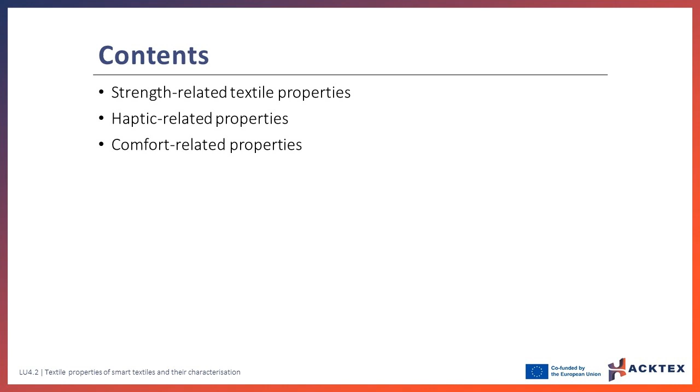In this lesson, you will learn about the most common tests used to determine the textile properties of smart textiles. The strength-related properties, which measure the behavior of the material under tensile, tearing, and friction forces, determined with tensile, tearing, abrasion, and pilling tests, will be described. The haptic properties, related to the tailorability of the material as well as its wearing durability, will be described next. Finally, the most common tests used to determine comfort-related properties, such as flexibility and wrinkle resistance, air and water permeability, and the capacity of textiles to absorb water, are described.

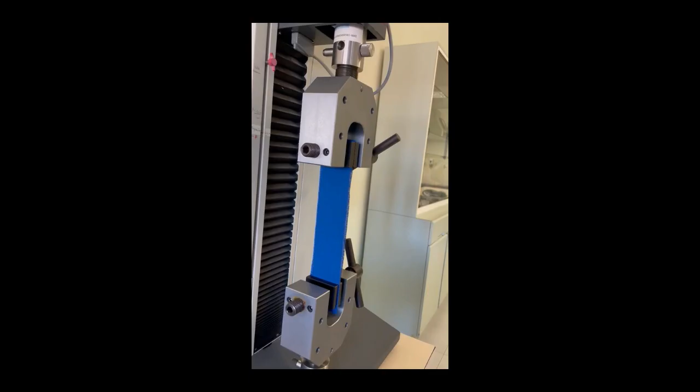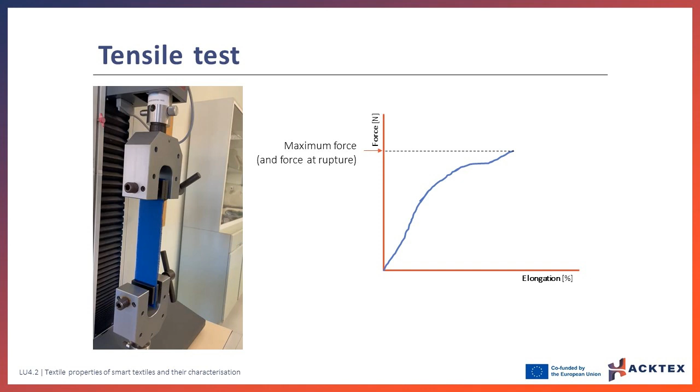The mechanical behavior of textiles when subjected to axial tensile forces is measured through tensile tests. In the tensile test, a specimen with specific dimensions is stretched at constant speed until breaking. The necessary force to perform the stretching, and the elongation of the material, are registered. The maximum force, given in newtons, and maximum elongation, in percentage, are determined.

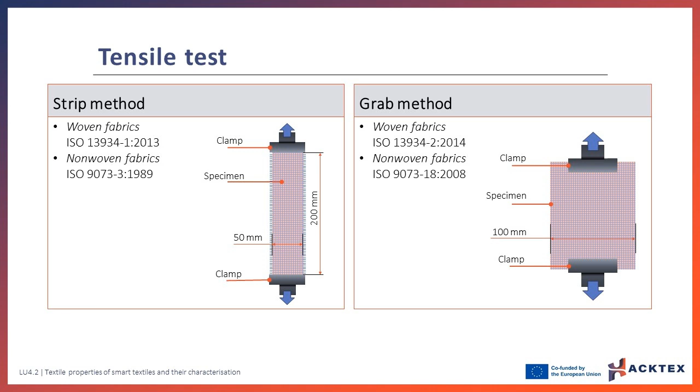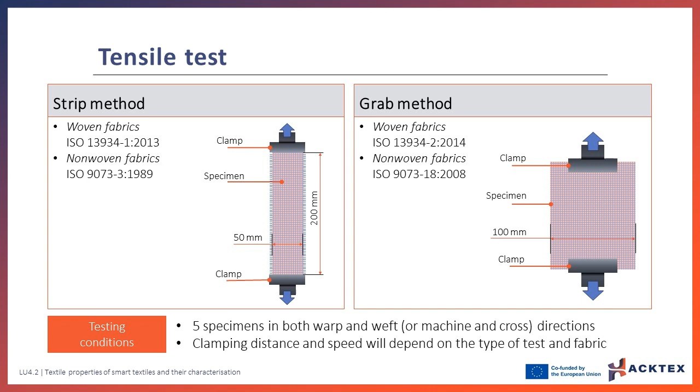There are two possible configurations for a tensile test: the strip method and the grab method. In the strip test method, the width of the specimen fits with the clamp's width. Typically a specimen of 5 by 30 cm is used with a distance between clamps of 20 cm. In the grab test, a wide specimen is mounted centrally in the clamps, with dimensions of 10 by 15 cm, and the distance between clamps depends on the fabric type. In both cases, 5 specimens per direction must be tested, whereas the clamping distance and speed will depend on the type of test and fabric.

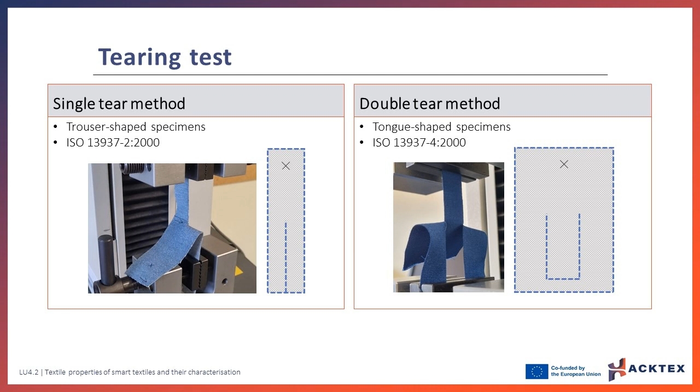The tearing test determines the resistance that a fabric offers to continue tearing at a constant speed, once started. They are performed in the same dynamometer used for tensile tests. The average force for tearing is determined from the curves. There are two possible configurations for a tearing test: the single tear method, using a trouser-shaped specimen, and the double tear method, using a tongue-shaped test specimen. In both methods, 5 specimens have to be tested at a constant rate of 100 mm per minute.

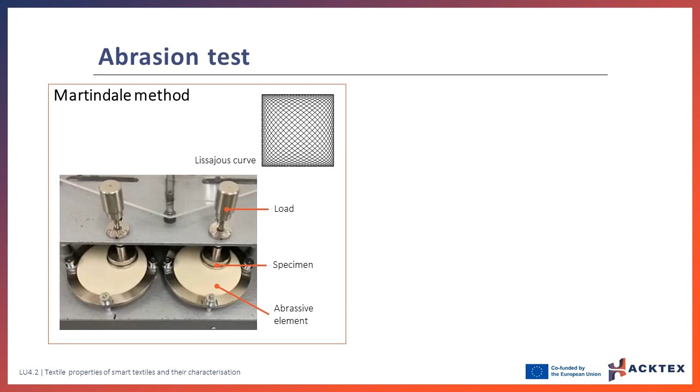The most common method to determine the resistance to abrasion of textiles is the Martindale test. In this method, two circular surfaces are in contact. The upper surface is covered with the fabric to be tested, while the bottom one can be covered with the same fabric or with an abrasive surface, such as a standard fabric. The specimen is subjected, under a specific load, to the scrubbing action with the abrasive element, following a translational movement that forms a Lissajous curve. At the same time, the specimen holder rotates freely around its own axis, perpendicular to the horizontal plane. The test consists of determining the number of cycles necessary to produce failure, reached when wear-off is observed in the fabric, or the loss of weight suffered by the test piece after a certain number of abrasion cycles.

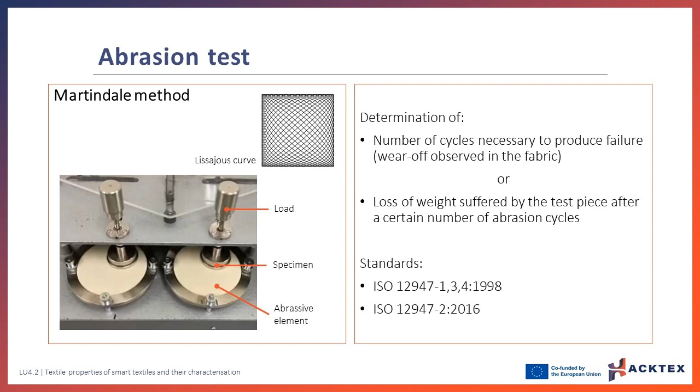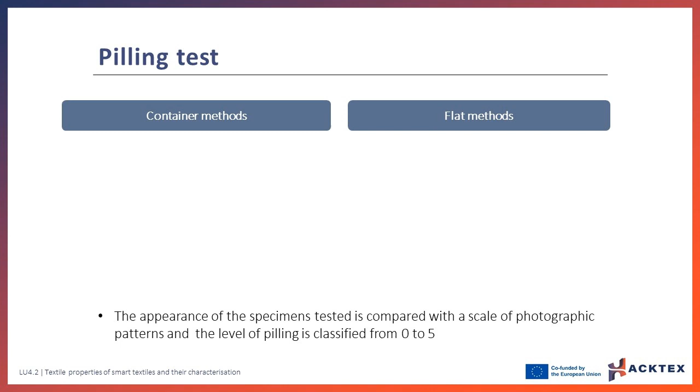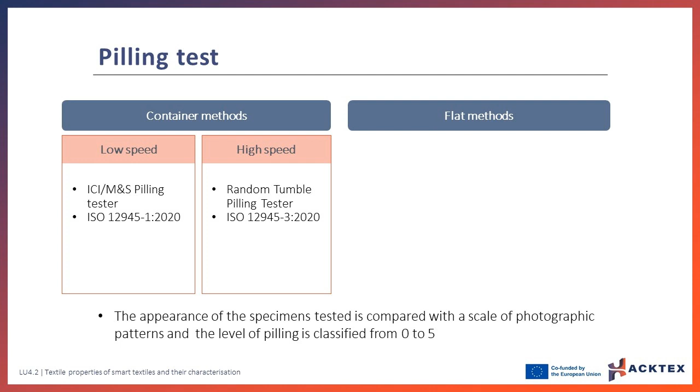Pilling tests consist of submitting specimens to mechanical friction, to evaluate their appearance afterwards by comparing them with a scale of photographic patterns. There are two types of methods to determine the resistance to pilling of textiles: the container methods and the flat methods. The container methods are the best to simulate the behavior of a fabric during use. These methods use different containers coated on their inner wall with moderately abrasive surfaces, usually cork. The specimens are introduced into the containers, where they remain for a long period of time, rubbing against each other and with the walls, due to the rotation of the containers at low speed or high speed.

Pilling can also be measured with specimens placed in a flat position, in contact with another fabric or surface located in a parallel plane. This uses the Martindale principle, as in the abrasion test, but evaluating the formation of little balls in this case. If you want to learn more about how to test strength-related properties, you can find extra information in the readings of this lesson.

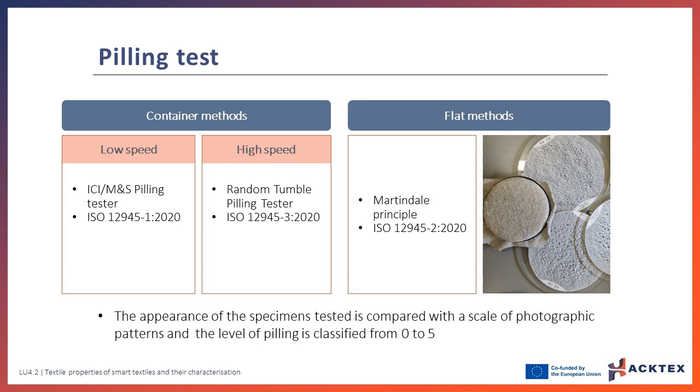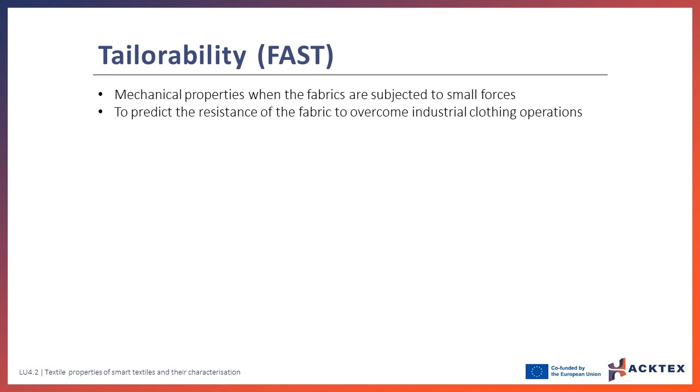Tailorability consists of the evaluation of mechanical properties of fabrics when subjected to small forces, in order to predict the resistance of the fabric to overcome industrial clothing operations. Tailorability is measured using the Fabric Assurance by Simple Testing equipment, also known as FAST.

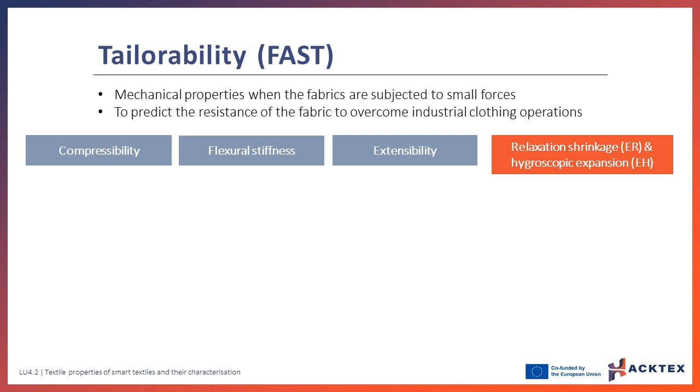FAST consists of 3 instruments to measure the compressibility, stiffness, and extensibility, and a test method to measure the shrinkage and hygroscopic expansion. The compressibility is measured as the difference of thickness of the fabric when subjected to 2 types of compressive loads of 2 or 100 grams per squared centimeter, respectively.

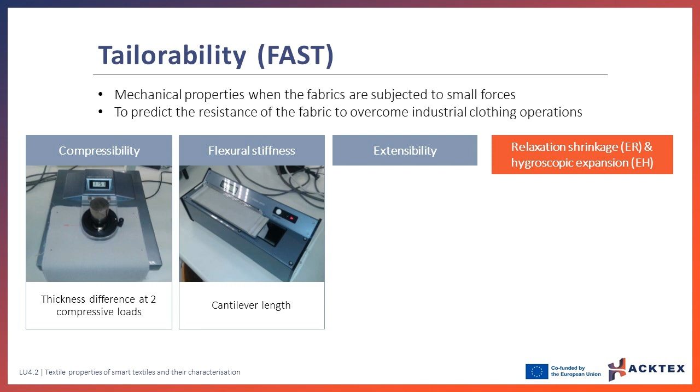The flexural stiffness is measured in both warp and weft directions by the method of cantilever length. And the extensibility is measured by subjecting the fabric to different loads.

The dimensional stability of the fabrics is measured by determining the relaxation shrinkage, or ER, and the hygroscopic expansion, or EH. In this test, the specimen is firstly subjected to oven drying and the distance between the marks of the specimen is determined.

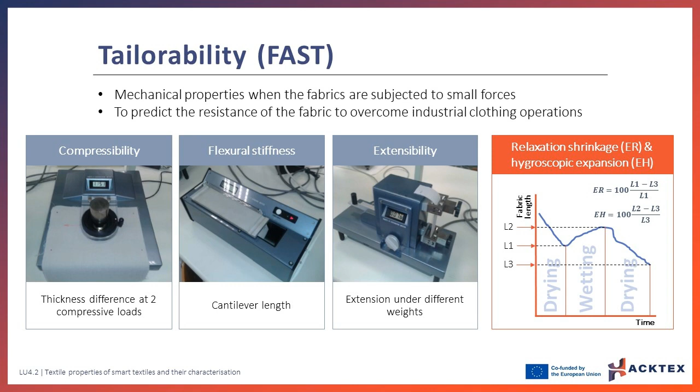Then, the specimen is immersed in distilled water, dried in room conditions, and the distance between the marks is measured again. Finally, the specimen is oven-dried, and the distance between marks determined. From this information, the ER and the EH are calculated.

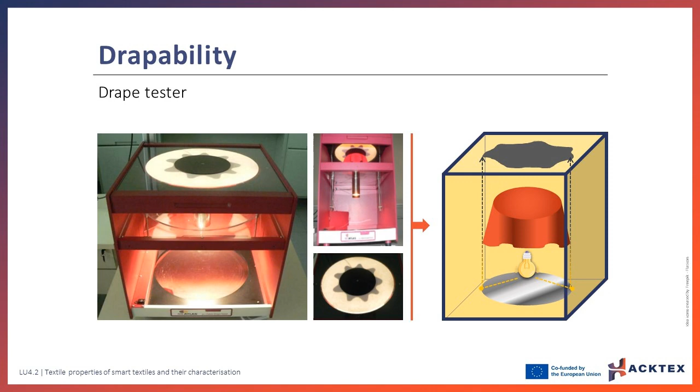The drapability is determined with the drape tester. In this test, a circular fabric is placed horizontally on top of a metal disc smaller than the fabric. Just below the center of the circular specimen, a light bulb projects a beam of light that is reflected upwards under specific conditions. Then, the projected shadow is determined.

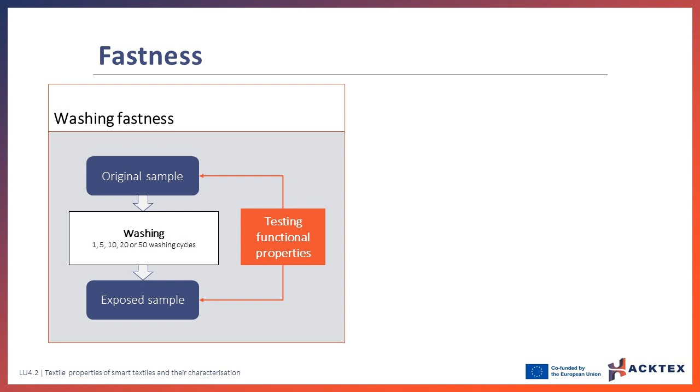In smart textiles for clothing and home textile applications, it is very important to determine the resistance of the textile's performance after subjecting it to washing. The washing fastness test consists of subjecting the fabrics to several washing cycles, usually 1, 5, 10, 20, or 50.

If you want to learn more about how to test haptic-related properties, you can find extra information in the readings of this lesson.

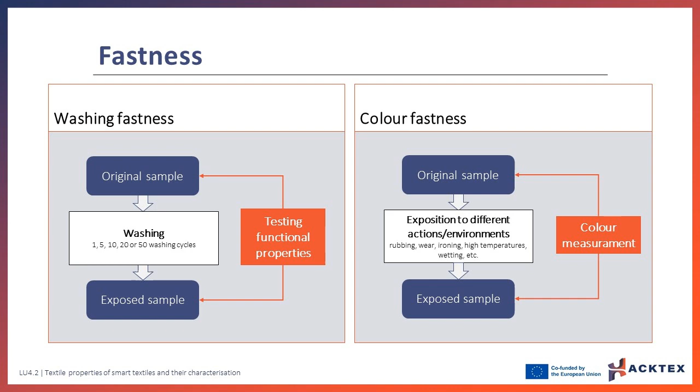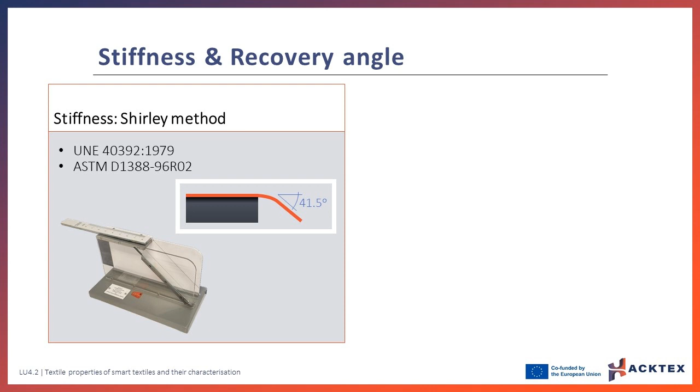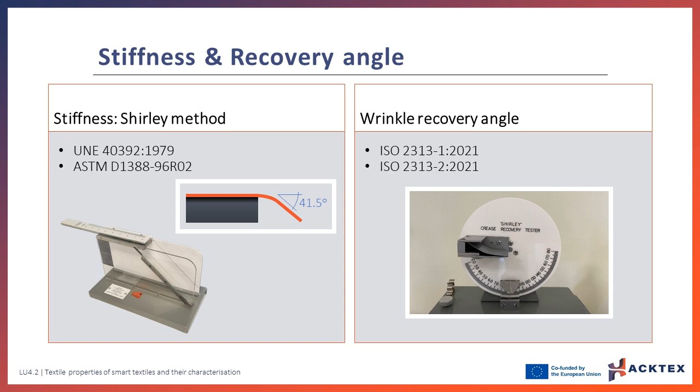The most widespread method to study the wrinkling tendency of fabrics is the one that measures the ability to recover wrinkles after subjecting the fabrics to wrinkling under a specific load. When the load is removed, the recovery of the specimen is allowed and the remaining wrinkle angle is measured for samples horizontally folded or vertically folded.

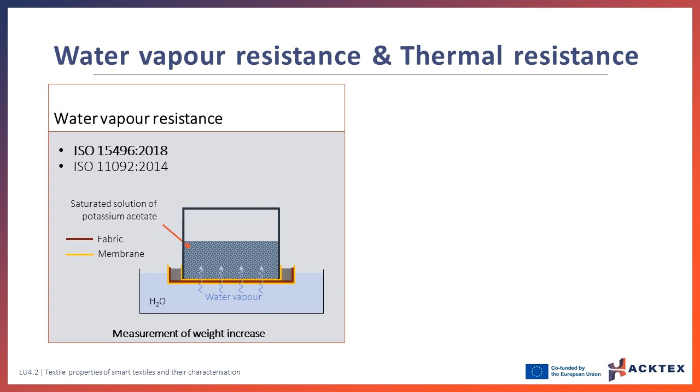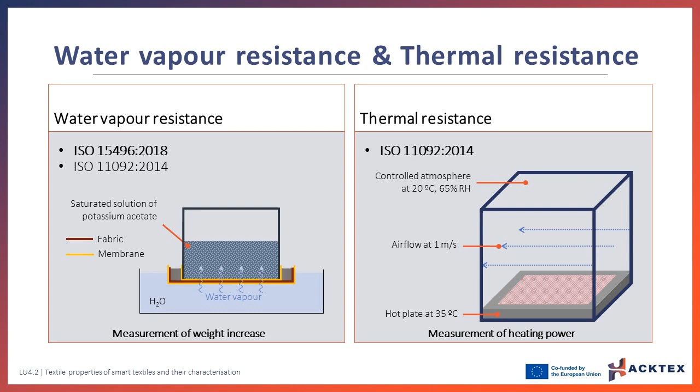The thermal resistance of the fabric measures the capacity of the textile to create a thermal barrier between the heat source and what has to be protected by the fabric. It is very important to know the level of protection for clothing and technical applications. There are different tests to determine the thermal resistance of textiles, but the most common used is the hot plate test.

The air permeability of textiles is a very important property for applications that need to control the amount of air that can pass through the fabric under certain conditions. Air permeability is understood to be the velocity of the airflow passing perpendicularly through the fabric, under the conditions of test surface, pressure drop, and time, specified by the standard.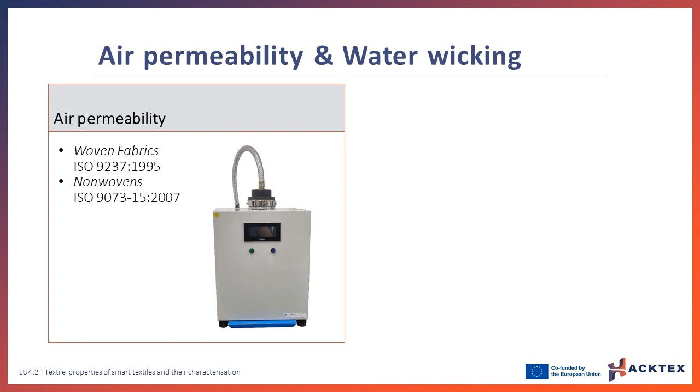On the other hand, the water wicking capacity of the textile, meaning the capacity of water to pass through the fabric when driven by capillary forces, is an important property related to comfort. This property is usually tested by wicking an end of the fabric specimen in water, and then determining the wicking distance at different time intervals in a vertical wicking test, or by determining how the water spreads in a fabric in a horizontal wicking test.

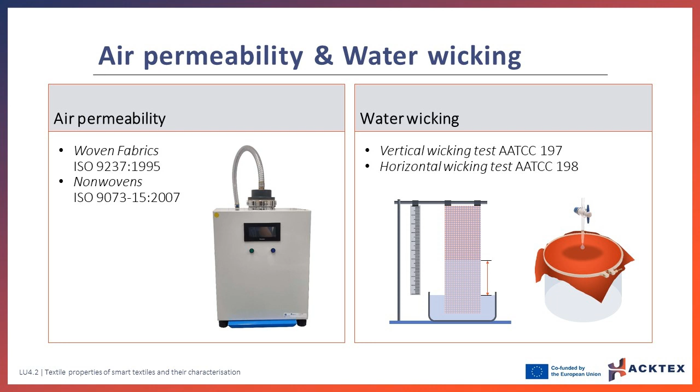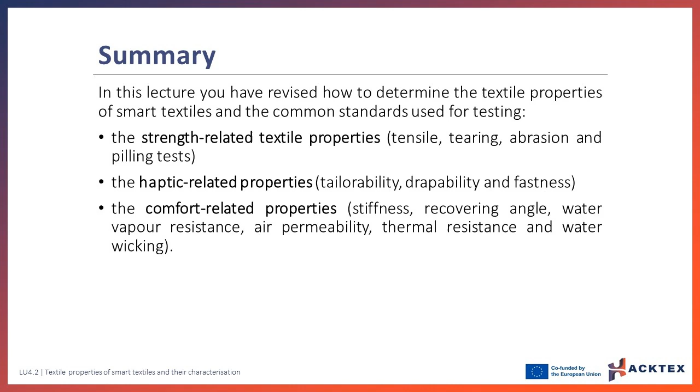In this lecture you have revised how to determine the textile properties of smart textiles and the common standards used for testing: the strength-related textile properties through tensile, tearing, abrasion and pilling tests; the haptic-related properties, by means of tailorability, drapability and fastness evaluations; and the comfort-related properties, measuring stiffness, recovery angle, water vapor resistance, air permeability, thermal resistance and water wicking.